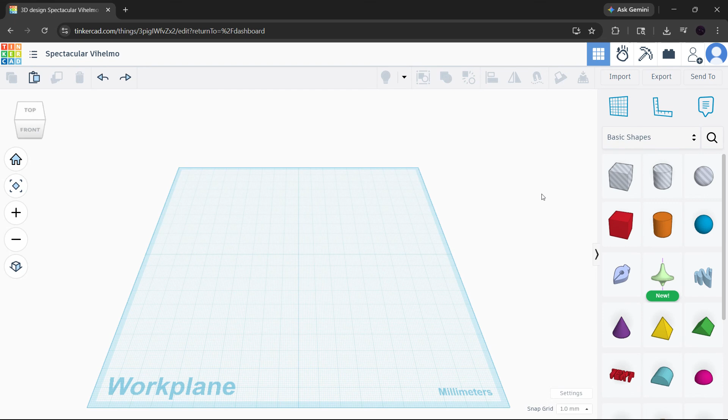Click on any basic shape in your workspace, and you'll see white handles appear around it. To increase the height, grab the top white handle and drag it upward. As you do that, the object becomes taller along the Z-axis, which gives you that extruded effect.

This is the fastest method if you just want to make a block, cylinder, or custom part taller without needing anything complicated. A helpful tip here is to keep an eye on the dimensions shown as you drag, so you can make your object exactly the height you want.

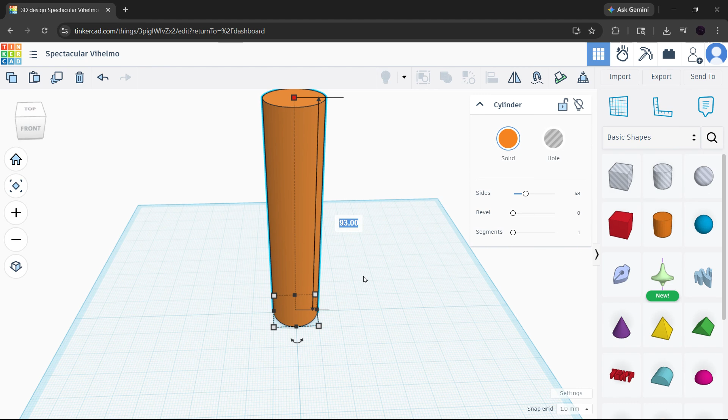If you need a more precise value, you can also type the measurement directly into the size box after selecting the shape. This gives you much better control, especially if you're designing parts that need to fit together.

Now, if you want to create a more complex extrusion, use the Workplane method. This is one of the best Tinkercad tricks for building shapes on top of other shapes. To start, press W on your keyboard or select the Workplane tool from the upper right area.

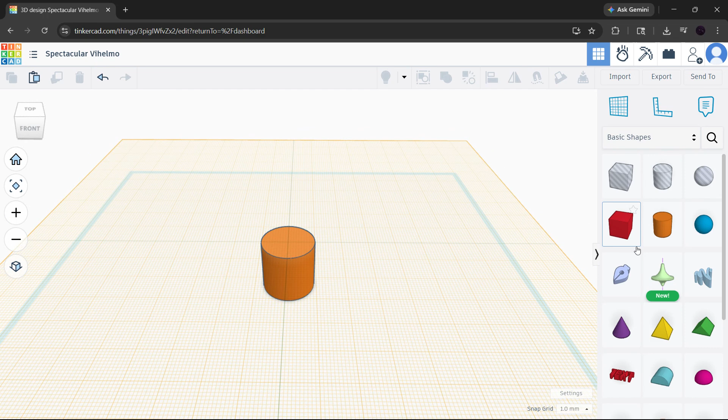Then click on the top surface of the object you want to build on. You'll notice that the grid moves to that surface, which means you can now place new shapes directly on top of it. Once the workplane is set, drag a new shape onto that surface. This lets you stack forms and build upward in a way that feels very close to extruding.

For example, if you have a base block and want to add a raised section, you can place another shape exactly where you need it. After that, adjust the size and position until it matches your design. This is especially useful for letters, layered parts, and custom 3D models.

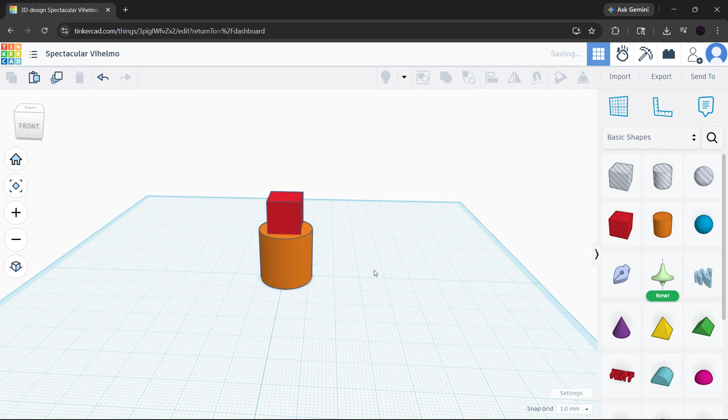When you're happy with the shape, select both objects and group them using Ctrl+G on Windows or Command+G on Mac. Grouping combines the shapes into one solid object, which makes the design look like a single extruded piece.

If your model uses holes or cutouts, grouping is also how you finalize those details. So for many designs, this is the step that turns separate parts into a finished 3D model.

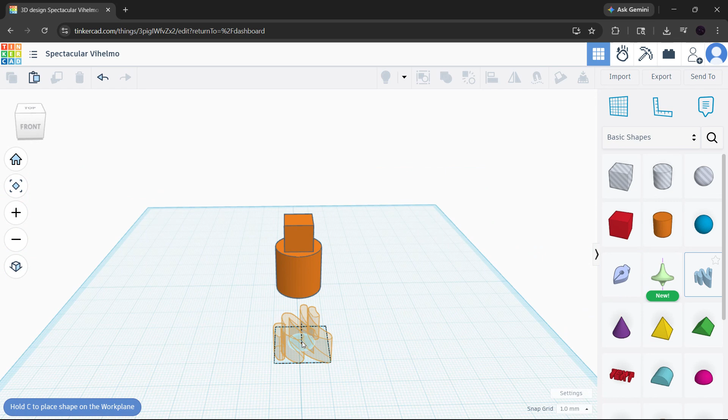Another easy method is using the Scribble tool. If you draw your own custom outline with Scribble and click Done, Tinkercad automatically turns that sketch into a 3D object. In other words, your drawing is already extruded into a solid shape.

From there, you can still adjust the height by dragging the top handle, just like with any other object. This is great if you want a more freeform or custom look without starting from a basic shape.

So remember, while Tinkercad doesn't have a direct extrude button, you can still achieve the same result by stretching shapes upward, using the Workplane tool, and grouping objects together. Those three methods will cover most of what you need for simple and even moderately advanced designs.